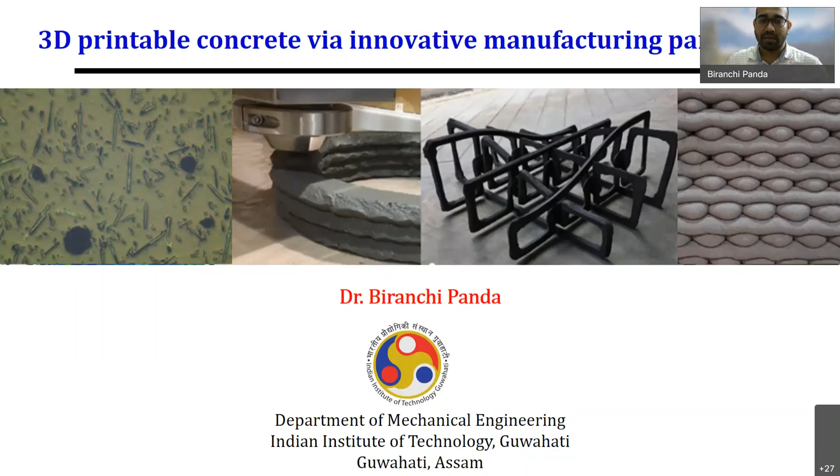Today I'm going to talk about 3D printable concrete. It's a bit of a different, new topic because this technology of concrete printing has evolved very fast in recent years. So I feel very privileged to work on this technology, and today I'm going to talk about the technological advances of this process and where we can adopt this technology for innovative manufacturing, especially related to the building and construction industry. I'm Dr. Biranchi Panda, assistant professor at IIT Guwahati. I'm basically a mechanical engineer, but I have interest in innovating the way we produce buildings through the 3D printing process.

Today the content of my lecture will be the introduction to this digital concrete process, where I'm going to talk more about the concrete printing process. It is purely an extrusion-based manufacturing process where we have to deal with very challenging requirements of rheology, which is the second aspect of my talk. I'll discuss the rheology of the printable material and the materials that we need to fine-tune for the extrusion of this printing process in terms of large-scale printing. Thirdly, we will also discuss the common process parameters and how process and property are related in concrete printing.

Finally, I am going to demonstrate some projects that I have already done and that we're planning to do at IIT Guwahati with the help of the concrete printing process. Without delaying much, I'll go into the digital construction technique.

What is digital construction? Nowadays everywhere we are talking about Industry 4.0, talking about how industry can be more digitalized. In this regard, our construction industry also needs some innovation in terms of automation and digitalization. But if you see the traditional construction process, it is more like a manual process, where laborers and workers are trying to put their hands together to create a structure. If you see this process carefully, you'll find it's a manual process starting from creating the formwork.

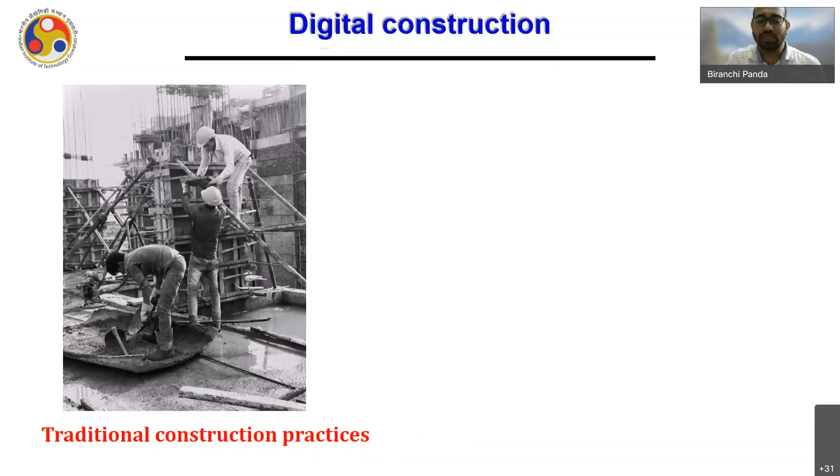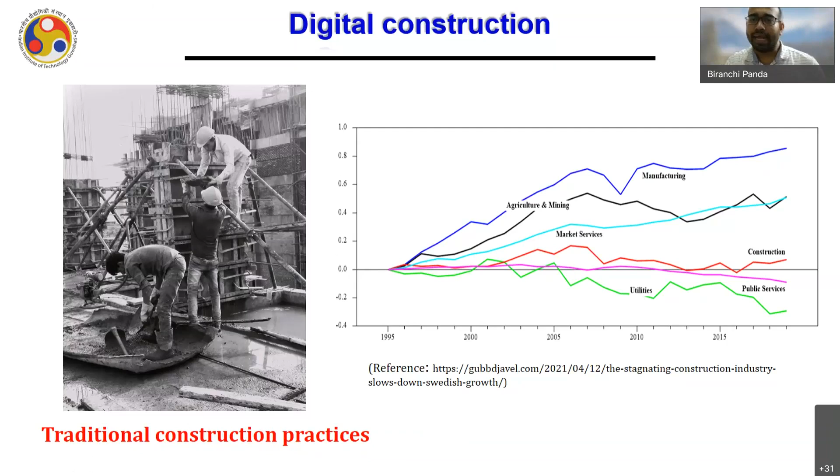So what is the problem with this traditional construction process compared to other manufacturing or other industries? If you see, the productivity is quite stable over the years. So it is very important now that we find some solution to automate the construction process and bring more digital technology into it, which really motivated me to take the help of the 3D printing process to contribute in this domain.

As I mentioned, apart from this labor work, sometimes the people working in construction are putting their lives at risk, where sometimes they have to climb very tall buildings to clean or to do maintenance work.

So these things, we can definitely try to find a technological solution where these problems can be minimized. Of course, the answer is not just 3D printing technology, but rather a group of technologies where we have to perfectly balance the combination to create an automated solution for this industry.

So yes, it's a very good question. Then what is the point of printing concrete? I have two prime reasons for printing concrete. One is design freedom. If you see the structure in my slide, it's a very complex structure. In this printing process, we do not need any mold or the formwork that I showed you previously.

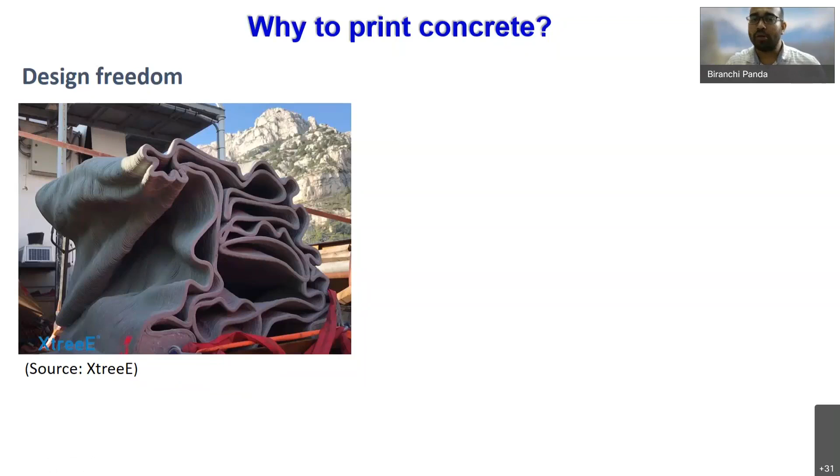So if you want to print a structure, we do not need any mold or formwork. Directly we can print the structure from the 3D model. So the first advantage is that I can print any design, complex structures, without the need of a mold. Ultimately, I'm going to save a lot of cost in terms of creating a mold box.

The second reason, which is very appealing or close to my heart, is all about sustainability. What is sustainability in terms of concrete printing? There is an example of a 3D printed concrete bridge in the Netherlands. What is unique about this bridge? If you see the cross section, it is not entirely solid. Rather, the topology has been optimized to reduce concrete waste.

What does it mean? With the help of this 3D concrete printing technology, now we can optimize the material distribution because we have design freedom. We can create an optimum design where we need less material. In this way, you are also going to save a lot of material wastage that usually happens in traditional construction. So sustainability and design freedom are the most critical points for me.

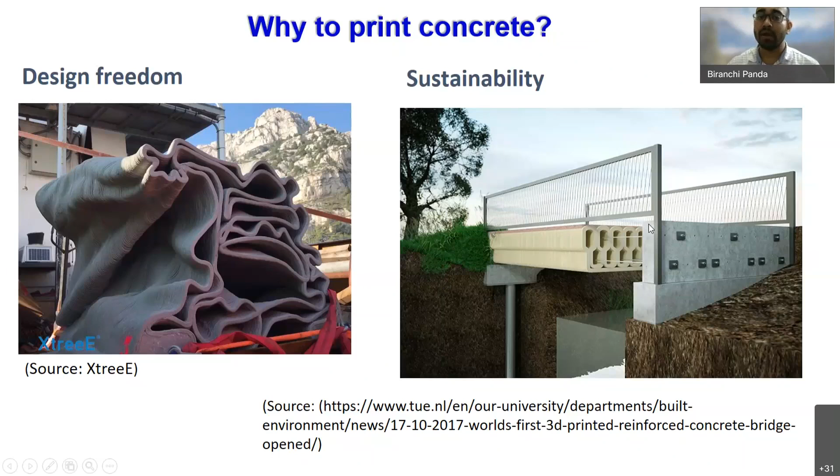But of course, since this is an automated solution, we have more advantages. We can work 24/7, laborers don't have to be there, we have reduced manpower, and the solutions will be more accurate. These are some other advantages of using the concrete printing process, because it's a technology-driven machine which can directly print your structure from a CAD model.

So this is an image of the concrete printing process, where very complex structures can be printed by depositing material layer by layer. As I mentioned earlier, this is almost similar to an extrusion-based 3D printing process. If you're familiar with FDM, where we deposit molten plastic layer by layer, it's almost similar, but the difference is that the layers are not hardened quickly in this process.

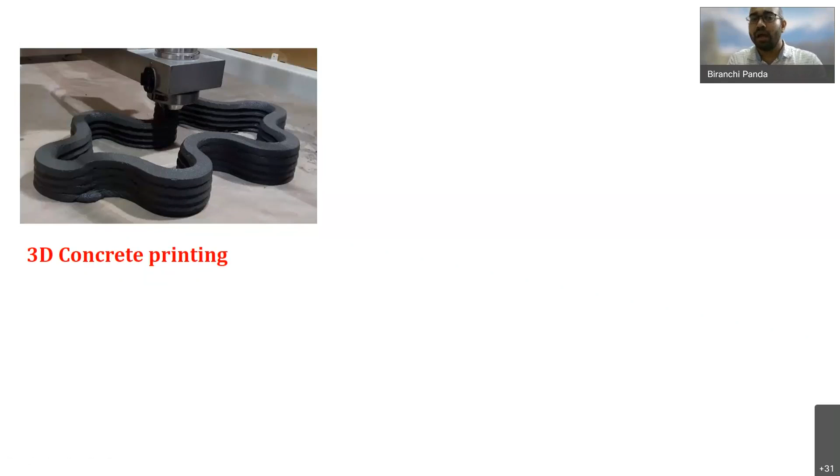You can see that all the layers stacked together are very fresh. It means I can still put my hand in and dig out some material — it's a very fresh material. So we have to deposit very fresh material in the concrete printing process. But in some other solutions, we may have to rapidly harden the material to deposit more layers. Depending upon the requirements, we design the material so the layers will be more stable and won't deform. So this is one automated process that can be applied to the building and construction industry.

There's another process known as D-Shape. It's similar to particle bed fusion. Let's see what happens here in the video. You can see it's a very big machine. What's happening is they're using sand.

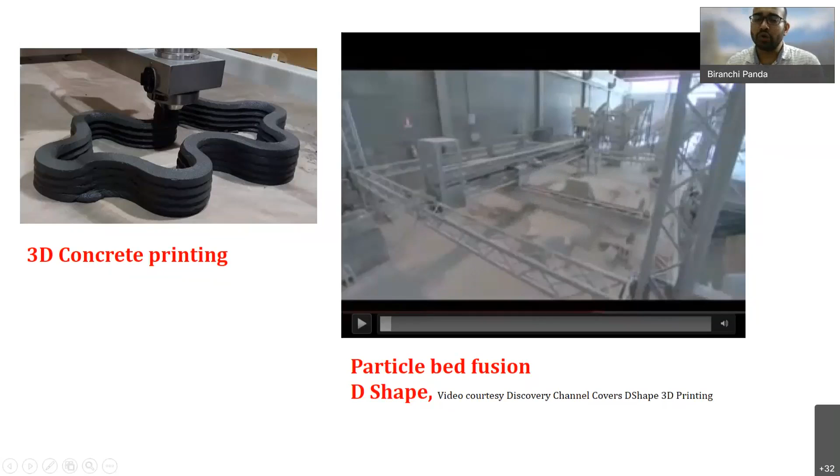They're using sand as powder, and we have a machine where this nozzle is carrying some binders. These binders are being deposited as per your CAD geometry. So ultimately, from a stack of sand, we are selectively depositing this binder, and after printing is completed, you can remove the loosened particles to get the final structure. These two processes are very similar to extrusion-based manufacturing and powder bed fusion. It's a very big machine, but the powder is sand. This is the nozzle, and these are the droplets adding binder over the sand particles to bind them together.

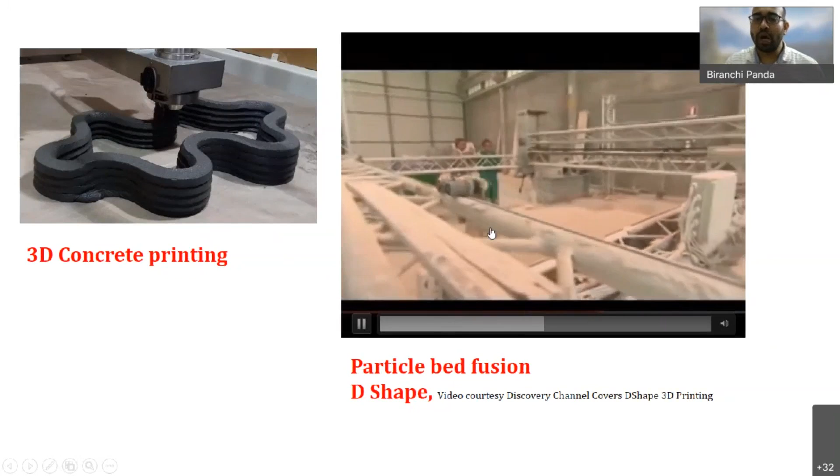Ultimately, you are going to create a very complex geometry — I hope this video will show it. These kinds of very complex lattice structures can be fabricated using this machine. The person you see on my screen is the founder of this technology.

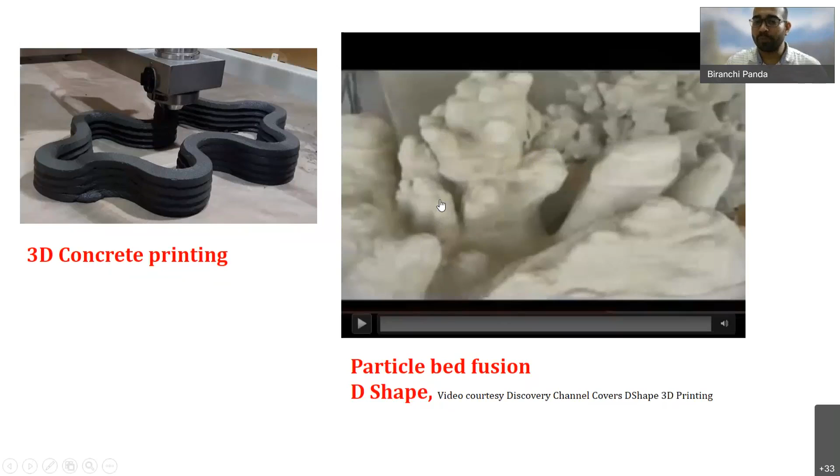So you can see you can create such complex structures using particle bed fusion. The advantage of this technology over extrusion based process is that you can make more overhanging structures because you do not have to put support material. But in extrusion based manufacturing, we have to provide support material or optimize the part geometry if we want to print overhanging structures. In D Shape, as you have seen, the sands act like a support material, so you can print more complex structures in a better way using the D Shape process.

So apart from this, this is all about the 3D printing process. But if I talk in general, what are the automated solutions that are still available in the building and construction industry?

One other process I would like to call smart dynamic casting. What happens here is if you want to create a column which is not cylindrical in nature - regularly, any beam or column has a square or cylindrical shape, but suppose I want an architectural shape, which is very difficult to create using casting. For that reason, this group developed this technology called smart dynamic casting. As you can see, the robot has an adaptable opening, which creates a very complex geometry by twisting this complete nozzle. During this casting process, the concrete is erected and this opening is variable in nature so that you can create very fine architecture over the surface.

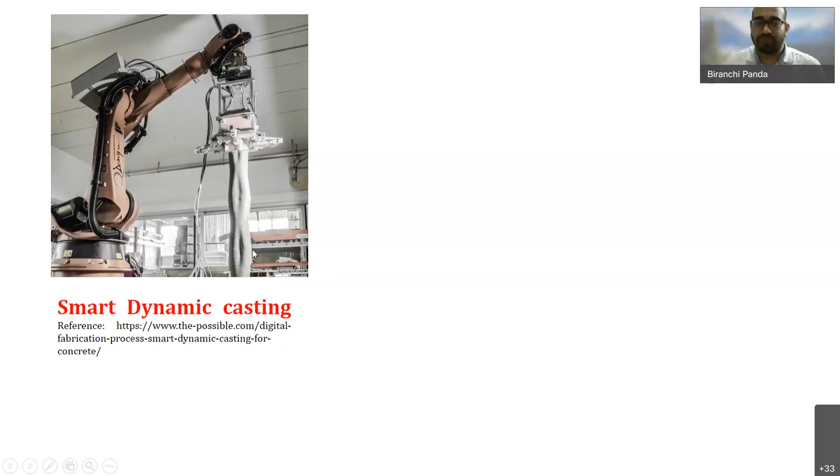Not only this kind of process, we have so many other robotic solutions currently being used in the construction industry, like robot bricklaying machines and robot plastering. So a lot of automated solutions are being implemented in our construction industry.

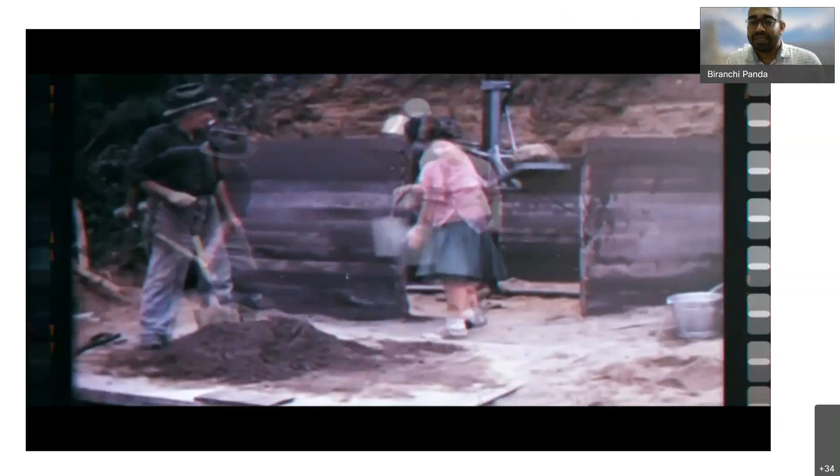But in this talk, I am going to talk more about the 3D printing process, 3D printing of concrete. This is not a new topic - if you see this video, which is almost 80 years back, there was a process where they wanted to print a building by depositing material layer by layer. The material was not exactly cement, and the machine was also not similar to today's machines, but the concept was there 80 years back. You can see in this video they are trying to deposit material layer by layer.

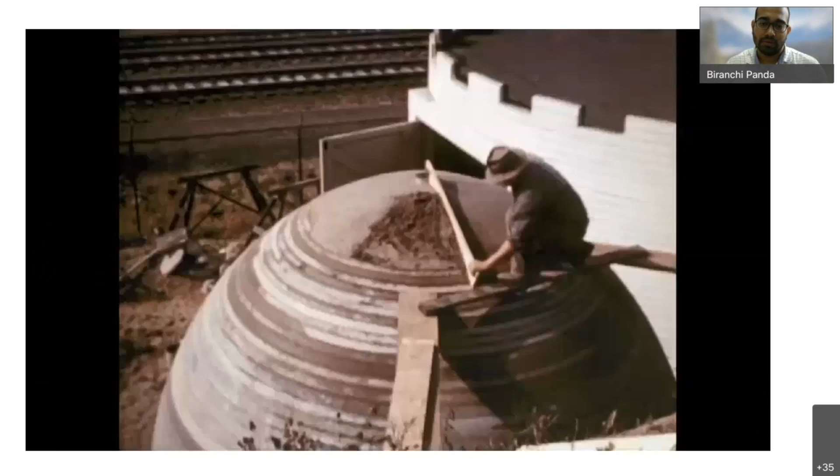This person's time was devoted to the invention of equipment for the food industry. He's the author of the first building 3D printer. He created a prototype, a machine to deposit material layer by layer, and they also called it 3D printing.

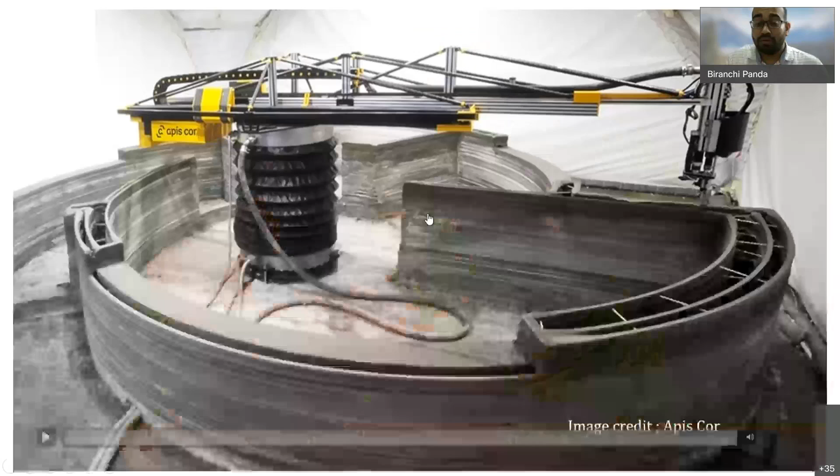After 80 years, news came that this machine could print an entire building in 24 hours. If you compare these two processes, the 80-year-old technology and this one, today we have more advanced machines in terms of robotics, with a higher degree of freedom, so you can create more complex geometries. Even the materials have changed a lot, but the process remains almost the same - we have to deposit the material layer by layer.

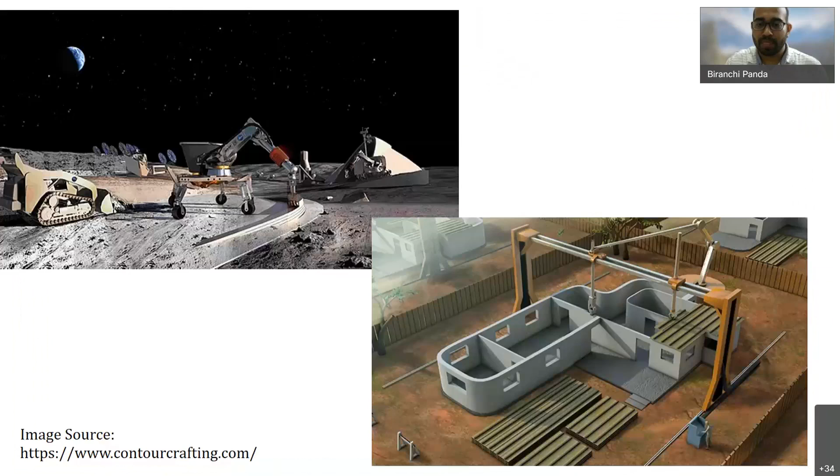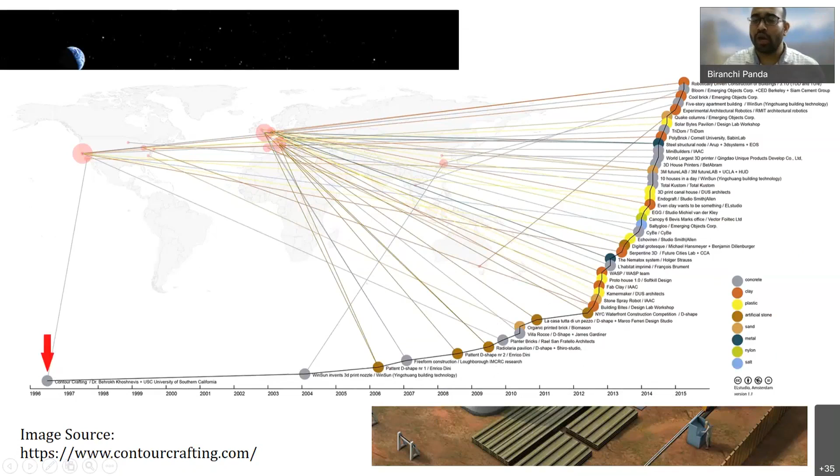After a few years of this technology innovation, it got a lot of attention on Earth, because people wanted to create building structures using similar processes. If you see the complete evolution of this technology, as I mentioned, Professor Khoshnevis put this concept long back, but in recent years, a lot of companies and universities have put a lot of attention into improving this technology, because they feel there is a real need for automated solutions in the construction industry. You can see the graph is increasing exponentially, and today a lot of companies are also doing these projects using this machine.

So how does the process work? As I mentioned, it is similar to the FDM process, where you have to deposit the layers by extruding the fresh concrete.

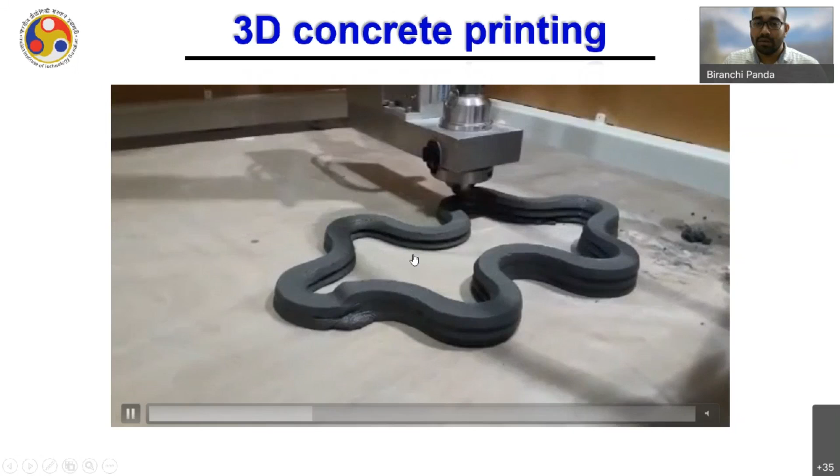This is the nozzle, depositing the fresh concrete. We have a pump bringing all the materials down to the nozzle. This nozzle is a 4-axis system because it rotates during deposition, and we are using a rectangular nozzle to deposit the material. This is a typical process of 3D printing of concrete.

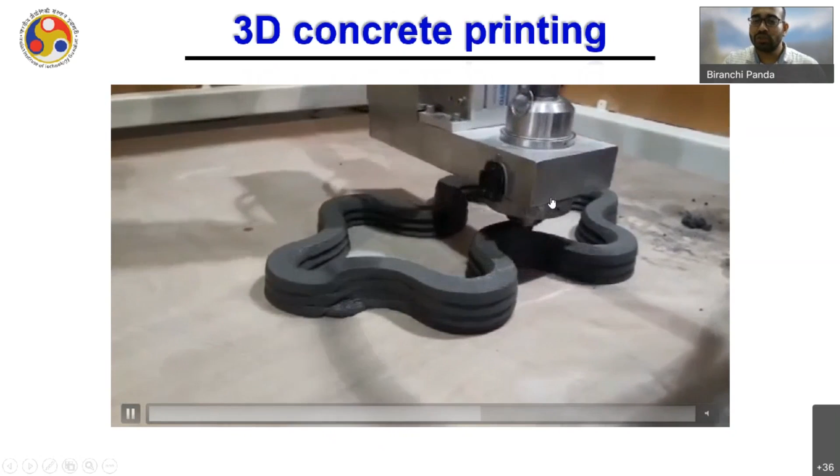You plan the design, and then you have a machine that deposits it layer by layer. We have a control system which provides feedback during deposition, so if any failure happens, the machine automatically recodes the whole system so the deformation or error can be compensated.

This is the machine used to deposit the material layer by layer. As mentioned, it is a 4-axis gantry printer. On the left hand side you can see a controller, and on the right hand side there's a pump. The job of this pump is to bring all the material to the nozzle, and this nozzle listens to the command from the controller and deposits the material over the print bed.

Unlike some FDM plastic printing processes, the bed is not movable here. It is completely stationary, but the nozzle, the 3 axes - X, Y, Z - can move according to the command from the controller. So this is one kind of concrete printing machine. It's not robotic type, but we call it a gantry type printer.

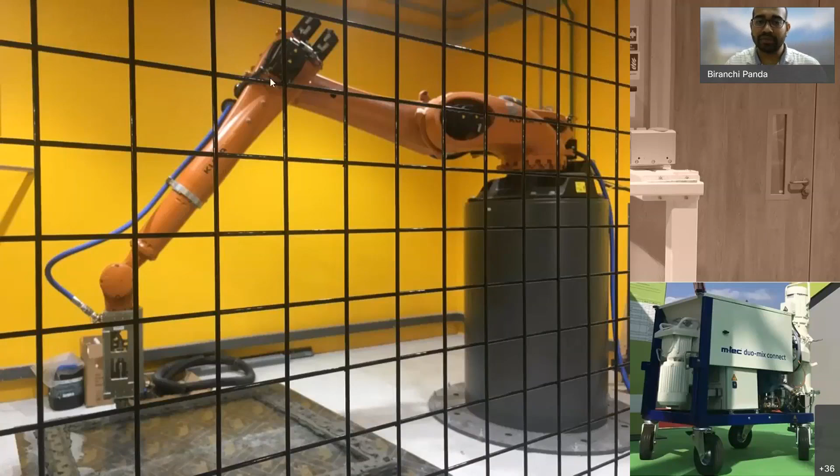But I also used a robotic concrete printer, as you can see, it's a big robotic arm. The nozzle system remains the same, meaning we have a connecting pipe that carries the material from the pump. If you program it, it deposits the material layer by layer to get the complete structure. Now let us discuss the unique material needs for this process.

If you see the concrete, it's a composite material. Those from mechanical engineering can assume this concrete is a composite. It is a mixture of sand, cement, water, and stone. But in concrete printing, we are not currently using stones, rather fine sands. So cement, sand, water, and some admixtures are currently used in the concrete printing process.

If you see the process carefully, it's clear we have to first pump the material to the nozzle. During this pumping process, the material has to be very flowable, otherwise it is very difficult to pump such concrete to the nozzle. So to create a pumpable mix, the viscosity of the material should be as low as possible.

But if you use low viscosity material, once you deposit it, because of low viscosity it is going to spread away easily on the print bed. This is not required in our concrete printing application, because we always want the material to remain in the same shape as the nozzle. Suppose we are using a square or cylindrical nozzle, the filament we deposit on the print bed should retain its shape as it is. If it flows or spreads away, it means the material is very poorly designed, or it's a very bad material for concrete printing.

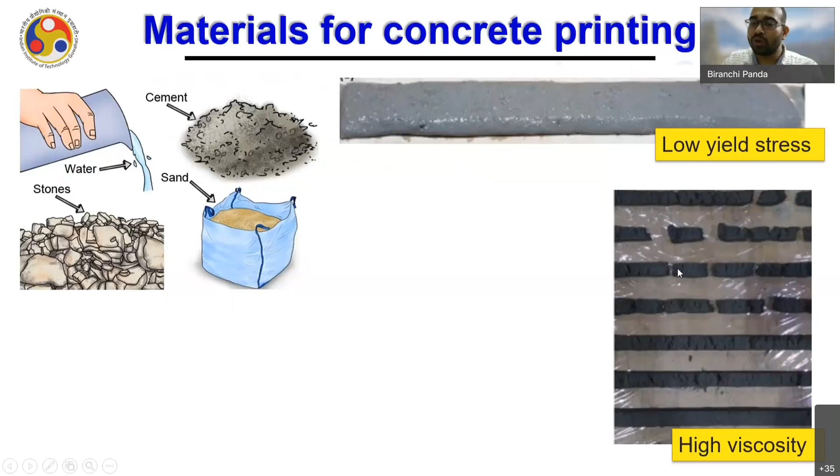But for my pumping process, I have to create a very flowable mix. Yet if I simply deposit this flowable mix, it will flow away on the print bed. So neither do I need this kind of material, nor a very stiff material. Because if I have a stiff material, I have to apply very high pressure for pumping, and once deposited, the layers will be discontinuous in nature. So this is the problem with high viscosity material.

So now let us talk about how we can improve this process. To improve it, we need to maintain a minimum yield stress so that the material should not flow away, nor should it be discontinuous during printing. So we need a minimum yield stress for pumping, and the same yield stress is responsible for holding the shape as per the nozzle.

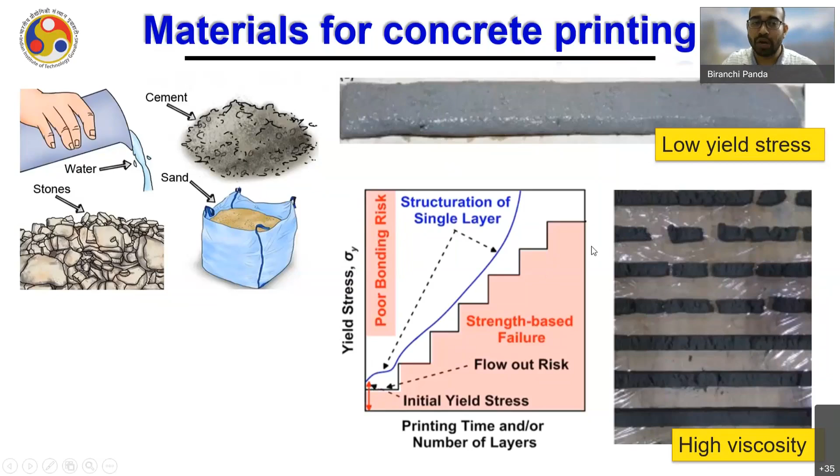But if the yield stress is very high, we are going to have an issue of poor bonding. And if the yield stress is very low, after printing 2 or 3 layers, it is going to collapse, as shown in this picture. So we need a minimum yield stress; if it's too low, after printing a few layers, it will collapse.

If the yield stress is too high, we are going to have a very poor interlayer bond strength. So what happens if you do the bond test? You will get a very poor interface bond strength.

This means we need a minimum yield stress for printing, and with time the yield stress has to be increased, otherwise you cannot deposit more layers. So again we come back to the same concept like FDM, where the material has to be hardened with time, because I want to deposit more layers. More layers means I want a structure beyond 2 or 3 meters in height, so the material yield stress has to increase with time so that it won't collapse during printing.

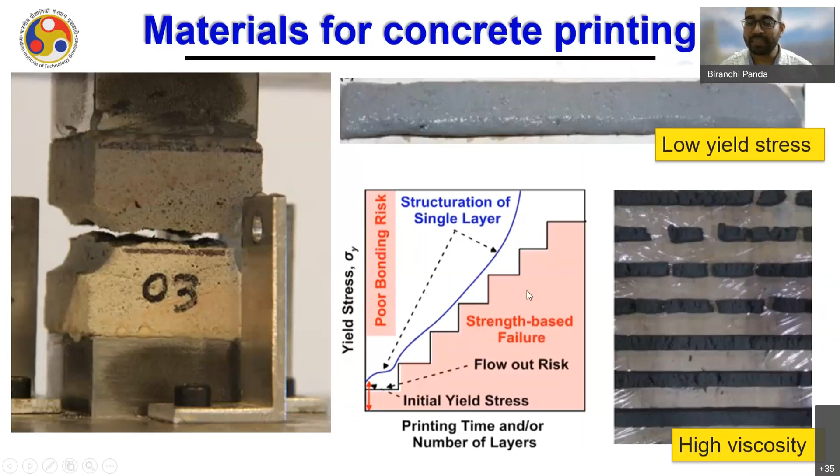So this is the key mechanism of designing material for concrete printing application. We also use the concept of thixotropy. What is thixotropy? It is a scientific phenomena of fluid flow.

For example, early morning when you press a tube, the paste comes out very easily. You don't have to press very hard to get it out. So we need very little pressure, but once you deposit the material, it remains in its own position. It neither spreads away nor is it difficult to squeeze out. This means the material has thixotropic property. Thixotropy means once you apply a high shear rate, the material should easily come out of the nozzle, but as soon as you remove the force, or stop pressing the tube, it should remain in its original position. That is the unique feature of thixotropy, and we need similar material property in the concrete printing process.

As I mentioned, the minimum yield stress is something around 1000 Pascal. If you maintain this kind of yield stress, we can deposit the layer smoothly without any deformation.

Can we get this yield stress if we use cement, which is very commonly used in the construction process? Yes, it is possible, because if you look at the mechanism of cement grains, this is explained with respect to time. Once you add water to cement particles, they try to flocculate, coming together because they have a van der Waals force of attraction. Also, with time, CSH particles get formed, and they try to bind the two cement particles.

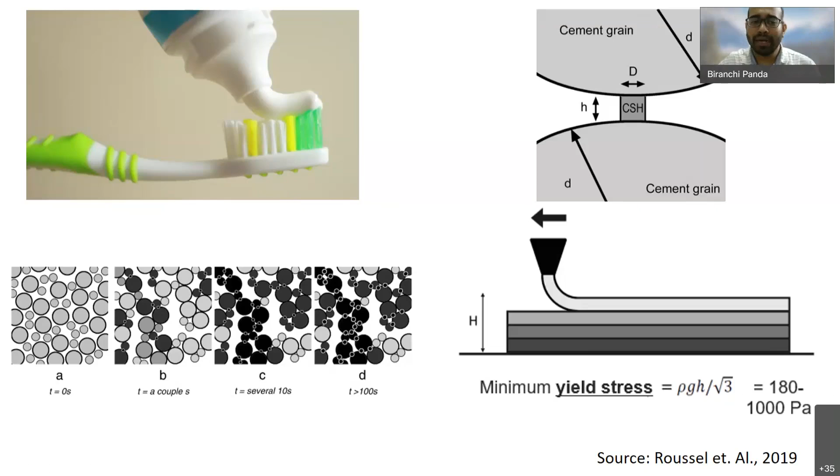For this reason, to maintain environment friendly material, we collected some industry waste and tried to replace it with cement. This industry waste is spherical in nature, a waste product of a power plant industry, and we wanted to replace cement with this industrial waste, thinking we could create a more sustainable mix design for this application.

When we replace cement with such spherical particles, they can easily flow away, so ultimately the yield stress becomes very low. If I deposit more layers, it is going to collapse after printing just a few layers. If you see the structure, it is completely collapsed after printing a few layers.

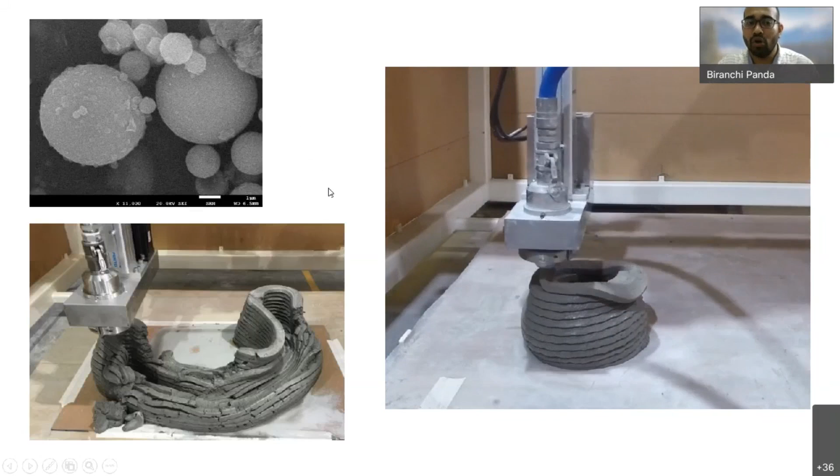We still wanted to use this industry waste in our mix design, because our goal was to create a sustainable mix. For that reason, we tried to investigate what else we could do to improve the buildability.

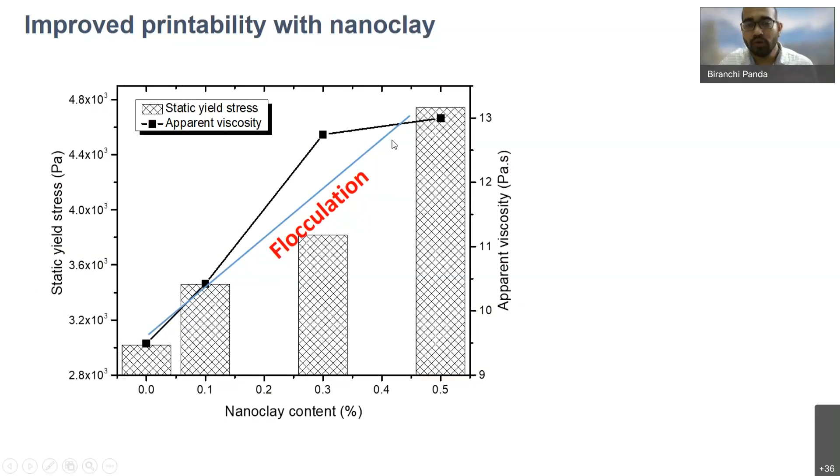If you look into the mechanism of how the clay is affecting the process, we found flocculation in the process, which is improving the yield stress of this waste-replaced material.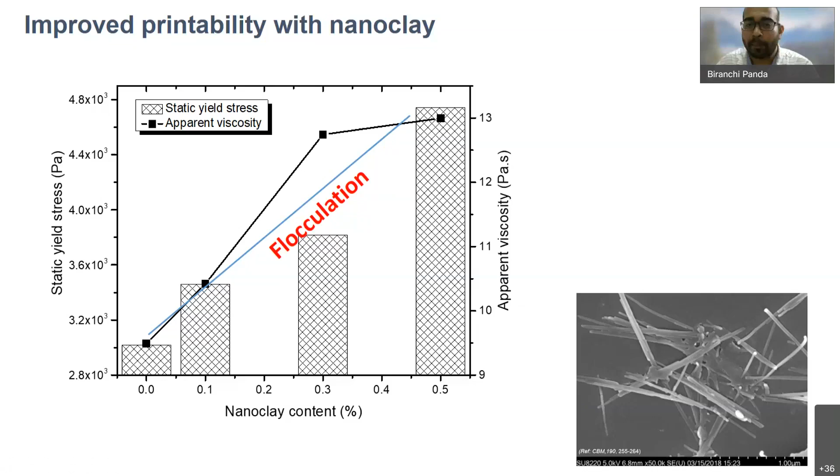So how does clay affect the rheology? There are several concepts demonstrated in the literature, but especially in the case we are printing concrete, we found the flocculation of the clay is very important, which improves the yield stress to a significant value, so that I can put more layers without any deformation.

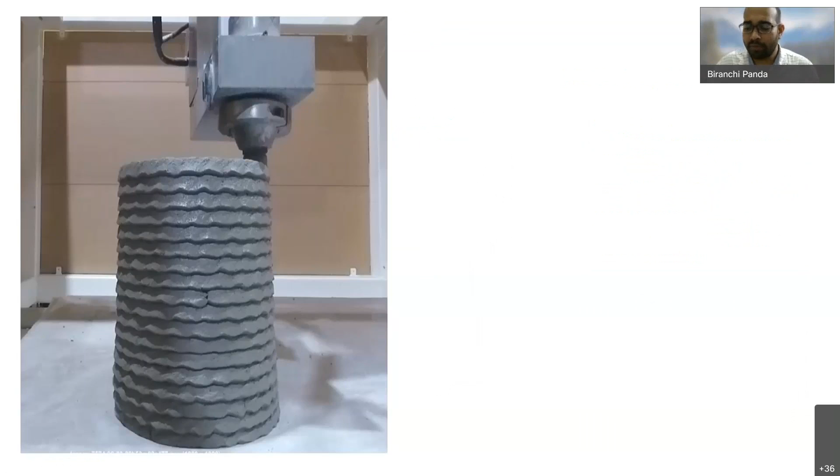As you can see, more layers have been added now without any deformation. So it is the clay that increases the flocculation, and as a result we can deposit more layers without structural collapse. Sometimes what happens is, since these materials are very fresh, deformation occurs.

So to avoid the deformation, we added a distance sensor which continuously monitors the distance from the top. If there is any deformation during the process, we get feedback, and accordingly the process parameters are adjusted so that the deformation can be minimized. This is how we improved the process to minimize deformation.

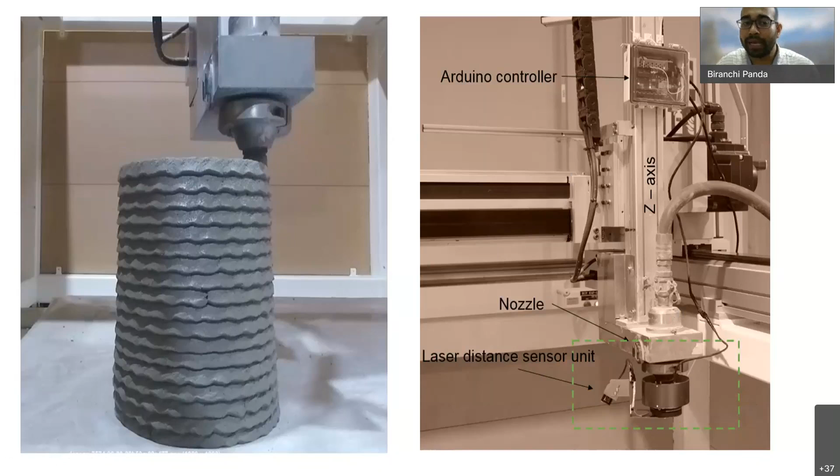Now, when you have thixotropy behavior in the material, it's very important to characterize the thixotropy, otherwise we cannot create a new mix design. To characterize the thixotropy, we use a rheometer available in our lab. We did two tests: one is shear thinning testing, and one is viscosity recovery, to measure the thixotropy of our material.

What happens in the shear thinning process? We take a bulk of material and apply a high shear rate to see what happens to the shear stress. With the material we printed, we can see that once you apply a high shear rate, the shear stress comes down to a very low value. This gives a factor of lambda around 0.41.

This says the material is very good for concrete printing application, because as soon as you apply a high shear rate, the viscosity or shear stress goes down to a very low value. If this equilibrium value is not low, it means that even after applying high shear rate, the material is not completely breaking down, and the shear thinning behavior is not good for your material.

This is how we characterize the shear thinning behavior, which tells us the effect of pressure on the material during pumping. If this breakdown is more, it means we can easily pump the material without any problem. So it's all about characterizing the pumping process through the shear thinning protocol.

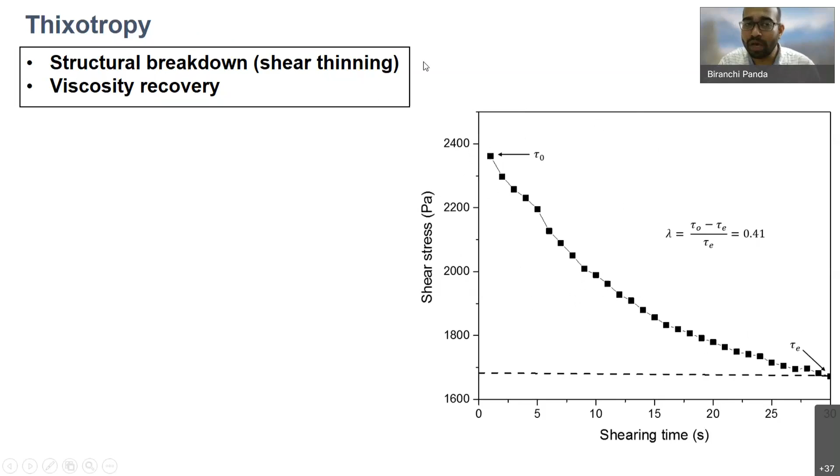Now once you deposit the material, it's very important to measure viscosity recovery. It's very clear that during pumping we need a low yield stress or low viscosity material. But the same viscosity cannot remain once you deposit the material on the print bed, because with low viscosity the material will simply flow away. So we want the material to recover its original viscosity - meaning, before you pump the material, what was its viscosity at rest.

So you mix the material, put it in a chamber, and measure the viscosity. During pumping, because of the high shear rate, the viscosity goes down to a very low value. But after you deposit this material on the print bed, it should have the capability to recover its original viscosity, or else it will simply spread away after deposition.

The material we printed has the ability to recover almost 80 to 90% of its original viscosity, which is really good, because this higher viscosity on the print bed helps maintain the shape of the filament according to the nozzle shape. This is how we always characterize new materials to fine-tune the mix for concrete printing application.

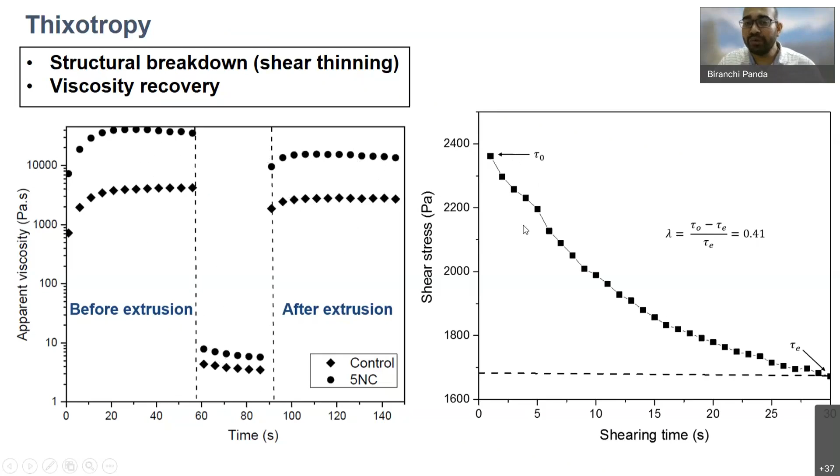So the material will get stronger with time, so that once you deposit the top layers, the bottom layers will also harden, and as a result, the structure is not going to collapse at all. So this was the initial development of using a waste material for concrete printing application.

Then we also worked for a competition organized by NASA. As I previously told you, the key concept was to create habitat for astronauts. They put an advertisement that we are going to have a competition where you have to print concrete structures, but the challenge was you don't have to use water. As you know, in concrete we always add water to mix the material, but for this competition we developed a new material which required very little water, as the competition targets using the minimum amount of water. So we developed another polymer known as geopolymer for this application.

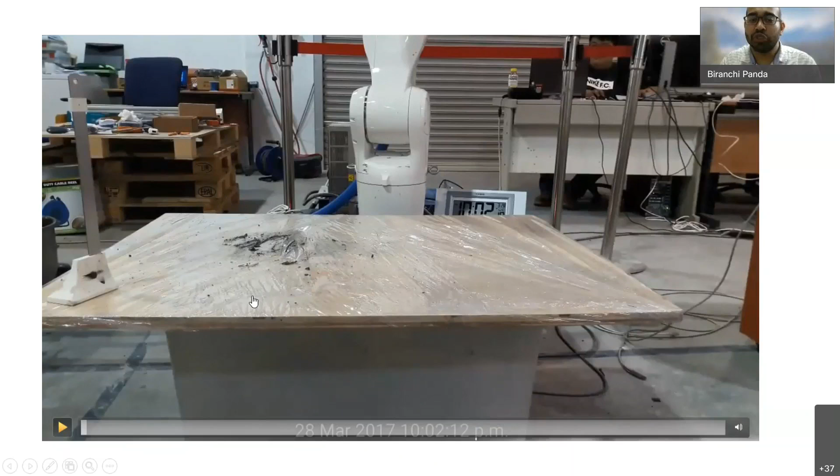As they mentioned in the competition, we have to use an automated system. So we had a small robot in the laboratory. We just converted it into a printing process, and you can see that with our newly developed geopolymer material, we were able to print some structures for them. It's a very simple machine. The robot is connected with a pump, and this pump is depositing the material directly to the extruder, and as per the CAD model, these materials are being deposited layer by layer.

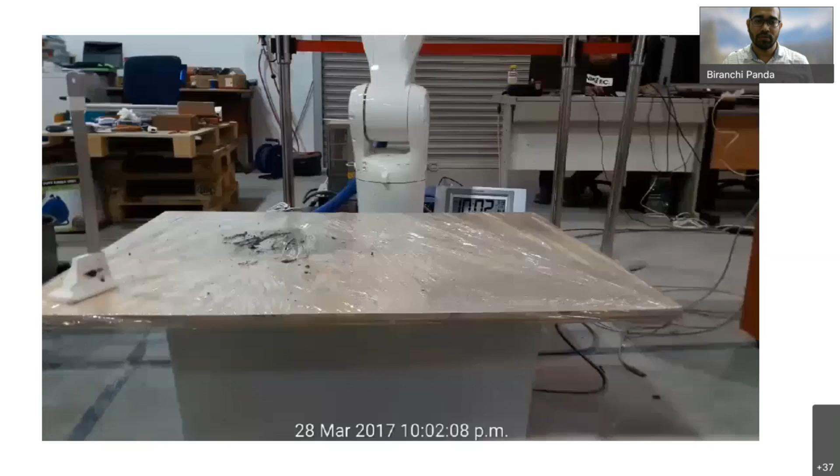If you investigate the material mix design, it contains the same waste materials like fly ash and slag, and instead of water we use an activator which is potassium silicate solution. This solution has higher viscosity than water, and it depends on the concentration of the activator. If we use a 1.8 molar ratio activator concentration, its viscosity is slightly higher than water, and if you go for a 2 molar ratio activator, its viscosity is again higher. So ultimately, according to the viscosity of this activator, we end up with a material of higher or lower viscosity.

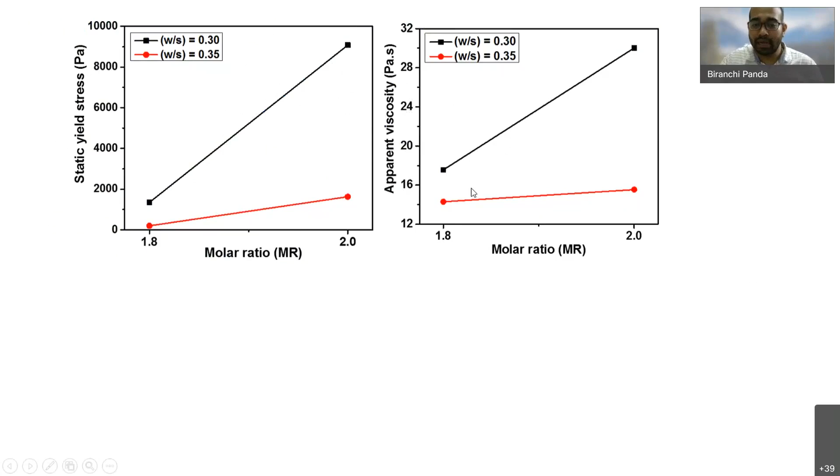In concrete printing, we have to carefully control the viscosity of the mix, so it's important to find the suitable activator for your application. Different activators and different molar ratios create mixes with different yield stress and viscosity, because the activator plays a critical role in controlling the viscosity of the final mix. When you have a concentration of 2.0, which creates higher viscosity, you'll expect a material with more shape retention compared to the 1.8 activator concentration material. So if you're trying to develop a new mix design, it's important to know the critical components affecting your viscosity, and if you know the viscosity needed for your application, you can control the mix design to have a controlled filament as shown in this picture.

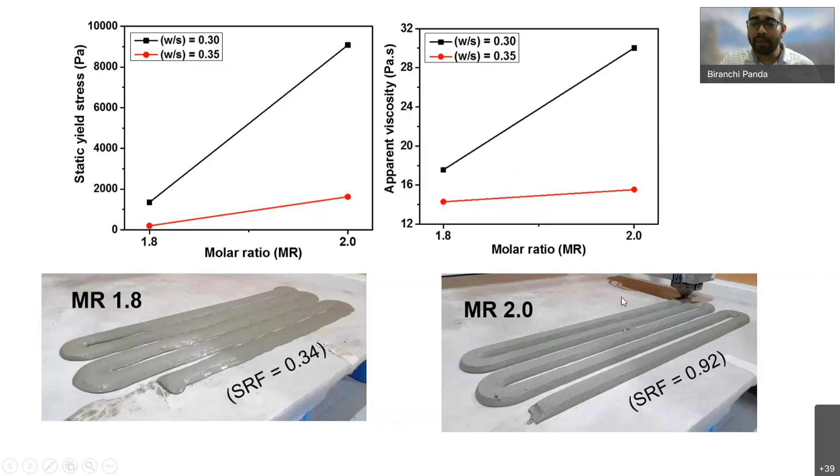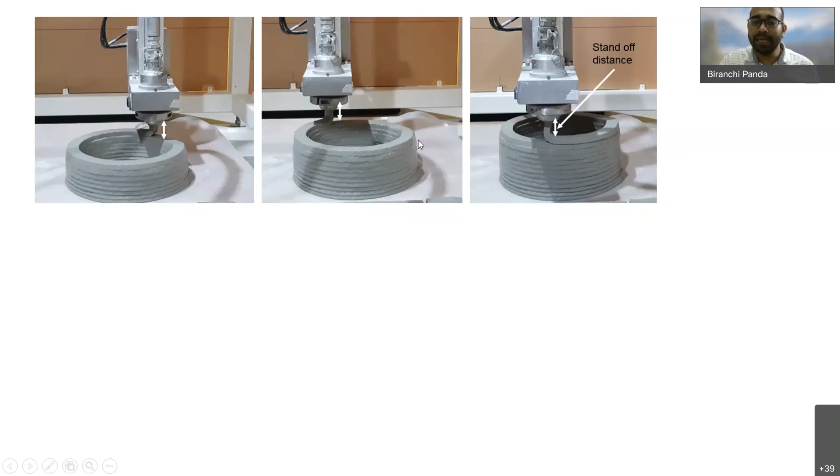Of course, if you add more layers, depending on the material's yield stress, the deformation will grow. What we've seen is that when you print a very poor material, after printing a few layers, this deformation height starts to increase. We call this the stand-off distance. With more layers added, this distance keeps increasing. But if the material is not deforming at all, it means all the layers are stable, and you won't find any deformation height between the tip of the nozzle and the top layer. This is how materials are always characterized for a final print.

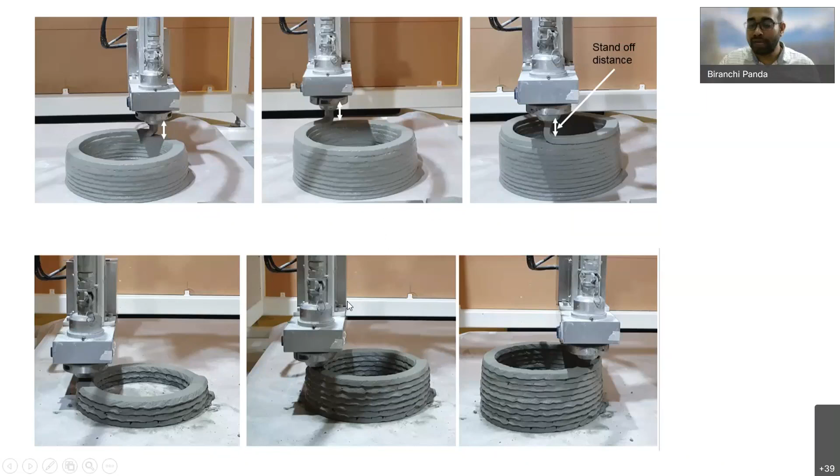So you may go either for a rheological test, or sometimes students try to do a test to find whether the material is slumping — in civil science we call this slumping behavior. If the material is slumping during printing, you'll get this stand-off distance increasing. But if there's no slumping, the material is very stiff and accurately deposited, you won't find any significant difference. This is how two materials behave completely differently from a concrete printing point of view. With this printing process, we're able to print 60 or more than 80 layers without any deformation.

We also try to print some overhanging structures to explore the possibility of printing complex geometries, because in 3D printing it is better to explore more complex shapes which cannot be cast. Ultimately we are able to print this new material without any issue of collapsing.

But the point is, if you want to do the same thing for the previous mix design, we have to do some modification at the nozzle, because to control the material buildability, we have to find some solution so that once you deposit the material, it quickly gets hardened.

There are different solutions you can adopt at the nozzle so that the material can be hardened. Some solutions use microwave at the nozzle to immediately cure the concrete so you can deposit more layers. Other solutions try to add some chemical so that the material quickly gets hardened after being deposited.

So there are many solutions to increase the hardening rate of the concrete being deposited, so that you can put more layers. If you go with the chemical approach, you add chemicals which decrease the setting time of concrete - setting time being the time needed to get hardened.

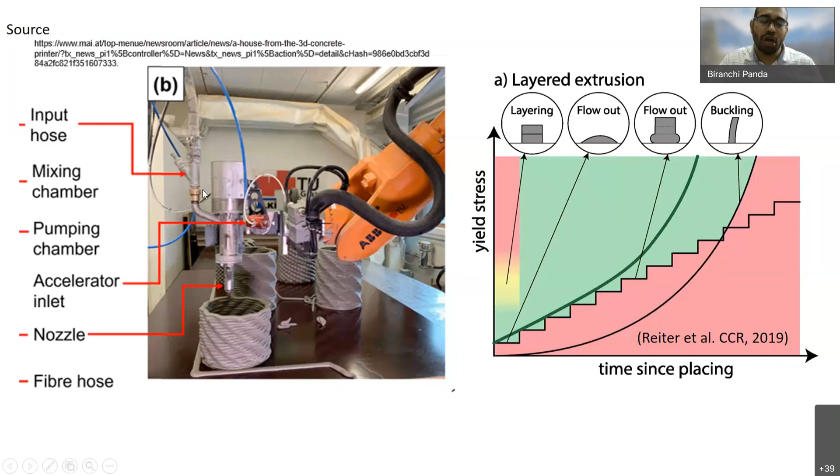This has been depicted in the picture - with time, if you want to print a taller structure, the yield stress has to go exponentially high. This is possible, as I mentioned, by adding chemicals or by adding microwave heating, which can cure the concrete at a much faster rate.

Apart from this test, we also developed some new tests to see the green strength, because you are loading the fresh material layer by layer, so it is very important to know how many layers you can deposit. The material being deposited experiences a compressive force from the top layers, so we conducted the green strength test to measure the load bearing capacity of this material.

We conducted the test at different time intervals. This is most important in concrete printing, because since you are printing a large structure, the first layer may be deposited at 5 minutes but the last layer at 150 minutes. The material behavior will change because concrete hardens with time, so it is very important to know how your material behaves at different time intervals.

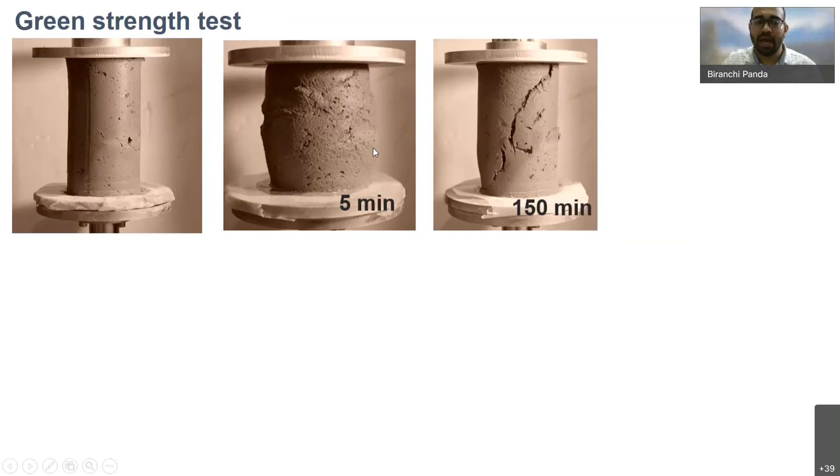To get more knowledge about the green strength, we conducted this test where we compress the material at different time intervals to know the load bearing capacity. We got this load versus deformation graph, and using this graph along with another test known as the shear test, which is used to find the shear property of the material.

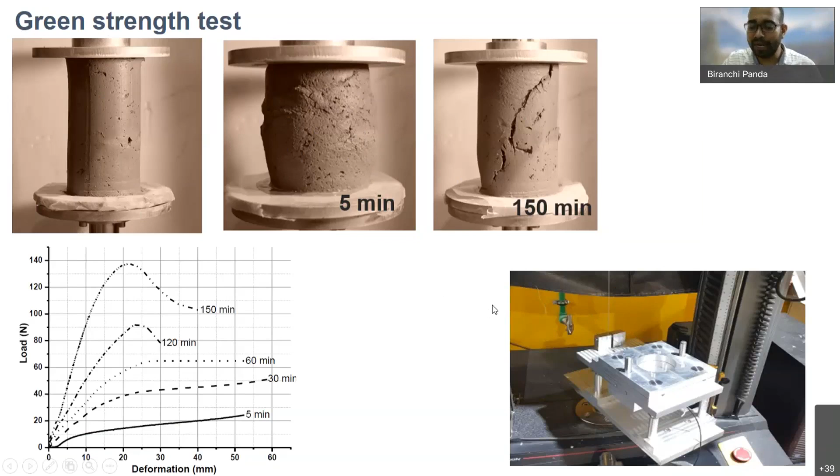Compressive property and shear property are combined together to do a modeling, so that we can at least predict how many layers we can deposit before the complete structure collapses.

This model incorporates the time dependent property of the material, so that if the material is hardening at a very fast rate, you won't see much stress on the bottom layer. Depending on the height of the structure being printed, this stress has been simulated in the model so we can predict the number of layers we can print.

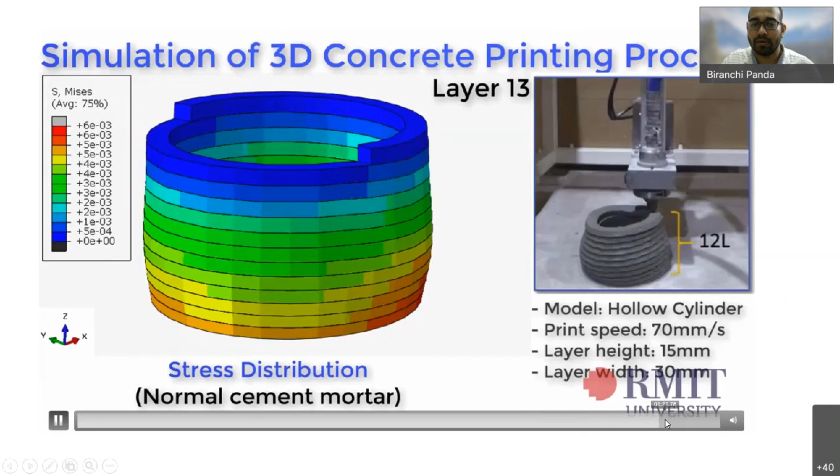So bulging effect you can see. So why is it important?

Sometimes we want to print a very tall structure, so we can't directly go on a trial and error basis because it's a very large structure. If it fails in between, it's a very difficult task to clean all the materials and reprint. So it is always better, with our experience and material data, to build a buildability model so that you can predict at which layer it is going to collapse. So we stop the machine and take a break before printing more layers, because by that time the material yield stress will improve, so that addition of more layers is not going to disturb the structure. So this is all about how you deal with material.

But in other 3D printing, we also deal with process parameter design. Similarly, in concrete printing, process parameter design is important. For example, if you want to print material at different speeds, without changing the flow rate, if you increase the print speed, the filament width is going to get smaller. And if you go very slowly, more material will be deposited, so the filament width is going to be more. So we always have to deal with this kind of problem.

So before we do printing, we have to optimize the relationship between flow rate and printing speed. These have to be combined together, otherwise the filaments will look very ugly — either over deposition of material, or sometimes the filament will be too small. So this is how we deal with printing speed and flow rate.

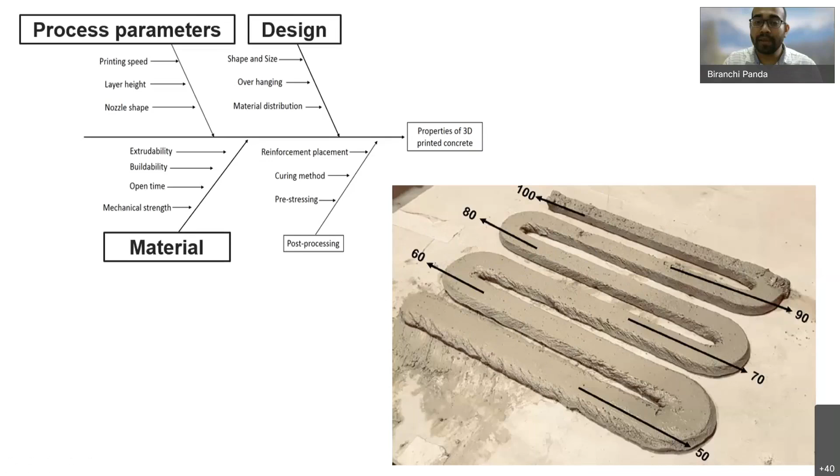Sometimes, depending upon the nozzle shape, we also get different properties. For example, if you use a cylindrical, circular nozzle, you end up with this kind of porosity. But if I have a square nozzle, I can get more compact structures. So one more point I'd like to highlight is that in concrete printing, only the nozzle shape is not important, the material is also important. Whatever picture you're seeing here, this material is very stiff, so you can see that even after printing, it remains its shape exactly the same as the nozzle diameter.

But now imagine the material you're printing is slightly slumpy. What's going to happen? This cylinder is going to turn into an ellipse, and as a result, you're going to get less pore space in the structure. So the key point here is that in concrete printing, it's not only about the material, but the process parameters are also going to affect the final print quality of the structure. So if I use a very stiff material with a circular nozzle, the layers will be exactly the shape of my nozzle, and we're going to get more porosity.

But the same nozzle can be used with a very slumpy material which is going to deform after printing, so ultimately it minimizes the pore. And instead, if I'm simply printing the whole structure with a square or rectangular nozzle with higher overlapping, this porosity can be further minimized.

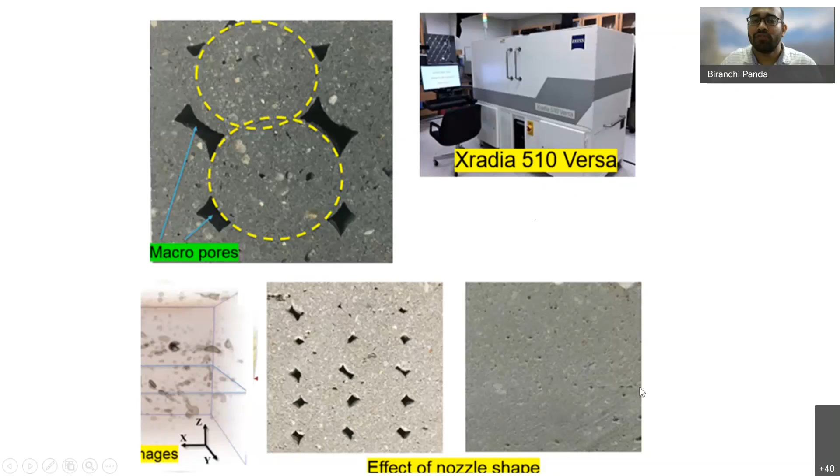So now let us talk about design. Why is design important? To do some design experiments, we printed a toilet unit — a 1.8 meter tall unit that we designed. During printing, we observed sometimes a cornering issue, which we call that because here we have a sharp radius of curvature. We found that during printing of this radius of curvature, we get some layer tearing on the outer periphery of these layers.

So you can see these tearings happen, and we investigated that it happens for many reasons. Suppose you're printing with a very stiff material, you can always expect this kind of tearing of the surface. But even if you don't want to change the material and still want to avoid this tearing, the only solution is to improve the radius of curvature. But from a design perspective, if you don't want to do that, what's the other solution? You have to make the material slightly more slumpy, so that even this sudden change in the radius of curvature or sharp turn doesn't affect it, because your material is now a bit slumpy, not stiff. Stiff material turning very fast with less radius of curvature, you're going to end up with such a scenario.

But if you keep increasing it, you're going to minimize this defect. At the same time, there are other solutions — as I mentioned, your material can be slightly softer, and you can also go slowly during this turning. So there are many aspects that finally control the quality of your printed object.

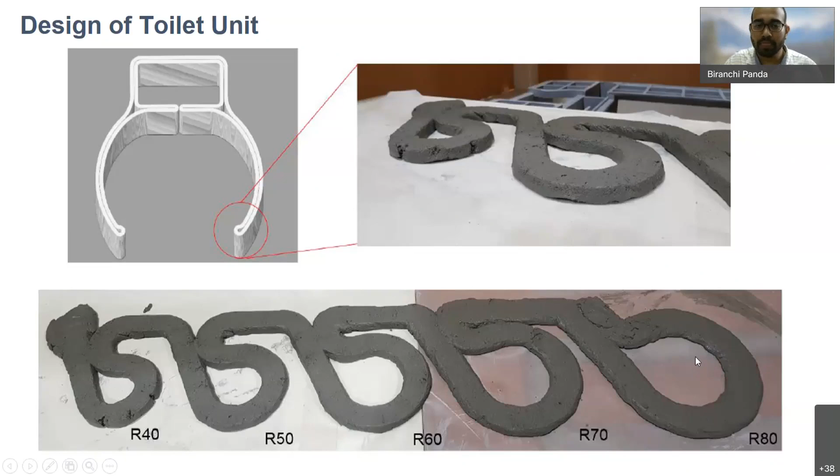Now let us discuss about the strength. Normally in casting, we have one strength, but in concrete printing or other 3D printing processes, we have anisotropic property. This means that in different directions, we get different strength. The same happens for concrete printing.

To prove that, we printed a block and then extracted smaller blocks out of this big cube. Then we applied force in different directions, F1, F2, F3. You can see these layers are oriented in different directions. We applied force in different directions and wanted to see whether this concrete has the same property in all directions or a different property.

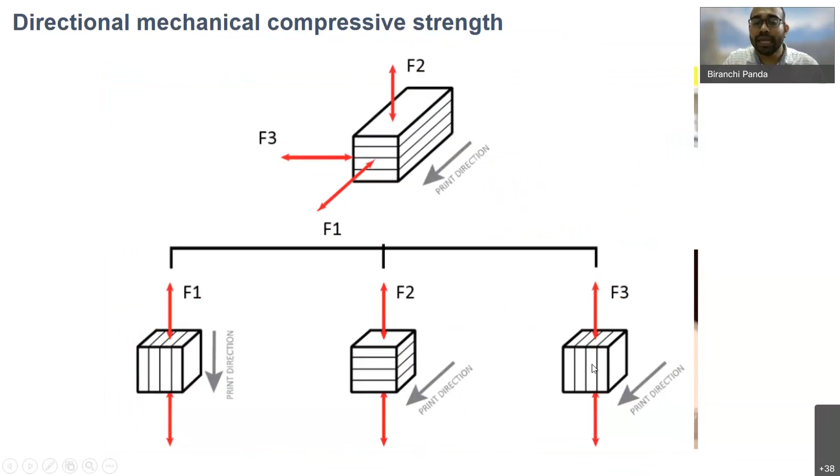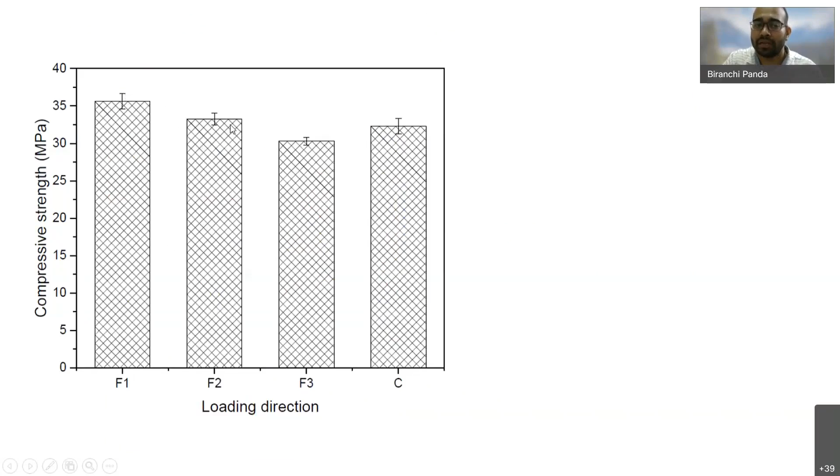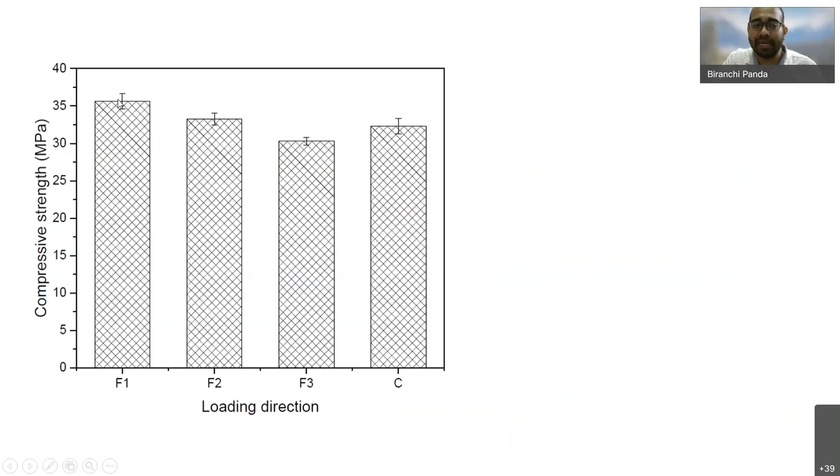We found that for compression loading, F1, F2, F3, though F1 has higher strength, the difference between F1, F2 and F3 is still acceptable in the building and construction industry, but it is slightly higher than the casted one. Why does this happen? Because if you're printing in the F1 direction, the material is more compacted in that direction, so of course you get more strength.

What is most interesting is when you conduct a 3-point bending test, because here two directions are very critical. In the F1 direction, if you apply force, the strength is going to be very low because in this sample the bond strength between layers was very poor. So doing the 3-point bending test in F1 direction, we ended up with very low bending strength, but in F2 we got the highest strength.

When we discussed the poor bending performance in the F1 direction, we found an interesting phenomenon, which is related to bond strength. If the bond strength can be improved, the strength in the F1 direction can also be improved.

So we started investigating the bond strength. For that, we printed two layers of concrete with different time intervals, because as we know the concrete hardens with time. With different time intervals we printed these two layers and did the bond test, and we found that this bond strength is a function of material, time gap, and process parameters. Let me explain this to you.

Suppose the material is hardening very fast; in that case, even a gap of 5 minutes between these two layers will create a very poor bond strength. But if the material is a 'sleepy' material that doesn't harden immediately, even if you delay 5 to 10 minutes, you will still get acceptable bond strength. So how fast your material hardens and what the time gap is are highly dependent on each other and affect your bond strength.

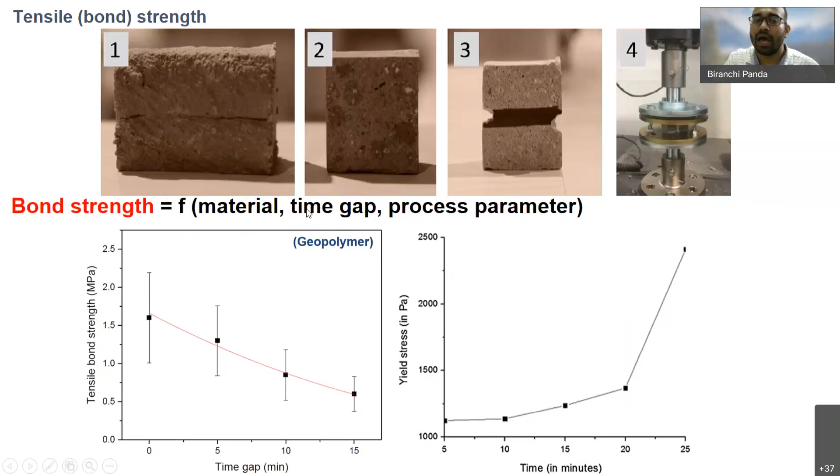What about process parameters? We found that during printing, if you print with a very slumpy material and squeeze it—meaning you press the layer—in technical language, pressing a layer means decreasing the layer height. When we decrease the layer height, and if the material is very fresh and slumpy, meaning it has fluidic nature, the porosity between the layers can be minimized.

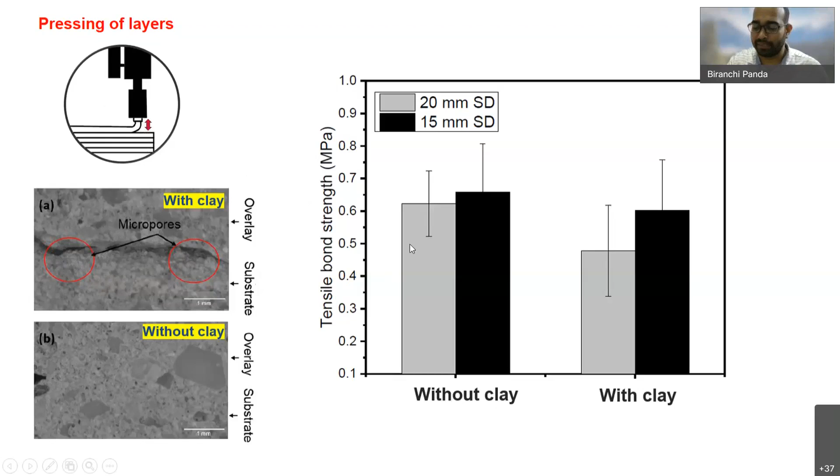The same thing does not happen if you have a stiff material, because even if you press during printing, there will be some voids which cannot be avoided. But if the material is fresh, this void can be avoided. As you can see, even by lowering this layer height during printing, porosity can be minimized, and reducing porosity improves the bond strength.

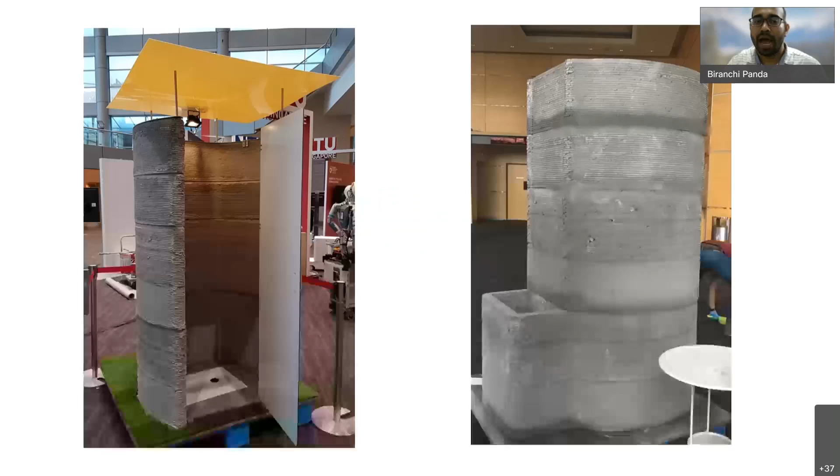With this knowledge of material design, process parameters, and structural design, we conducted a few projects. As I mentioned, our first project was a demonstration of toilet printing—almost a 2-meter tall toilet unit. We printed this, and at that time our Prime Minister visited our university. We demonstrated the technology, and he appreciated that within a very short span of time, the whole structure could be printed.

Of course, there are some problems which can definitely be solved in future printing. But he really appreciated that this is how we should print structures, even more complex ones, which do not require any mold. Without the need of a mold, you simply design the structure, press the button, and it prints the entire structure for you.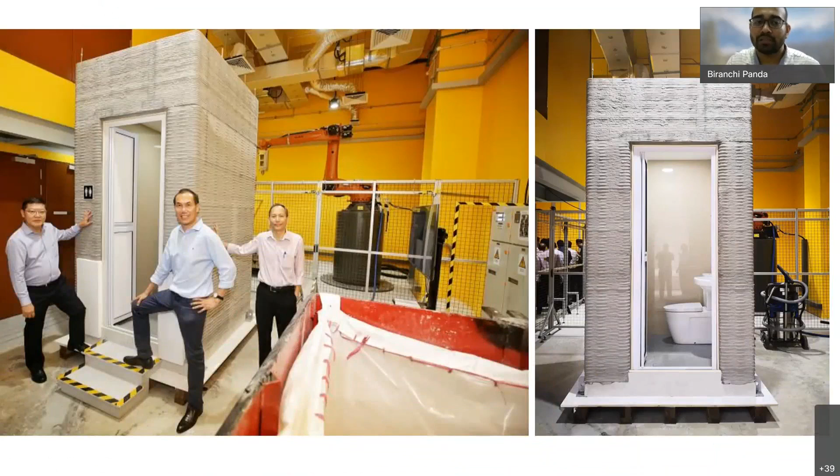The next project was about printing a complete bathroom unit, almost 3.2 meters tall. Since the gantry printer was not sufficient, we used a robotic printing system to print the entire bathroom unit. The bottom part was cast, while the walls were printed with lattice structures. We preferred lattice structures because they make the wall more lightweight.

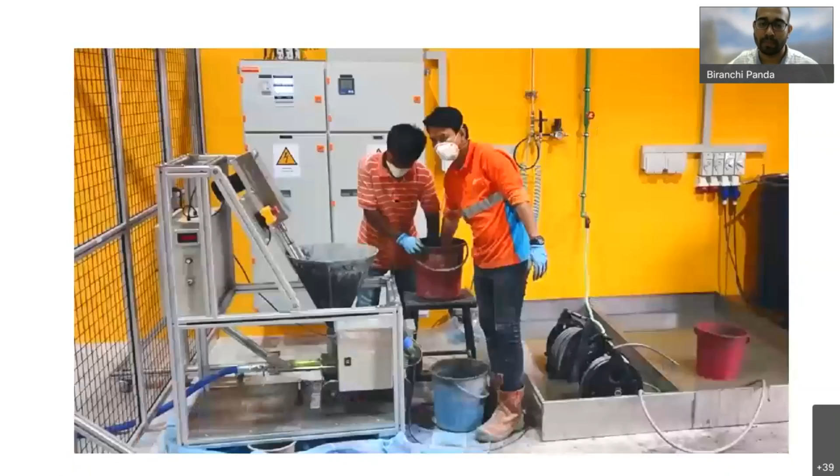I hope there's a video so you can see the complete printing process. See the pump—it is going to push all the materials.

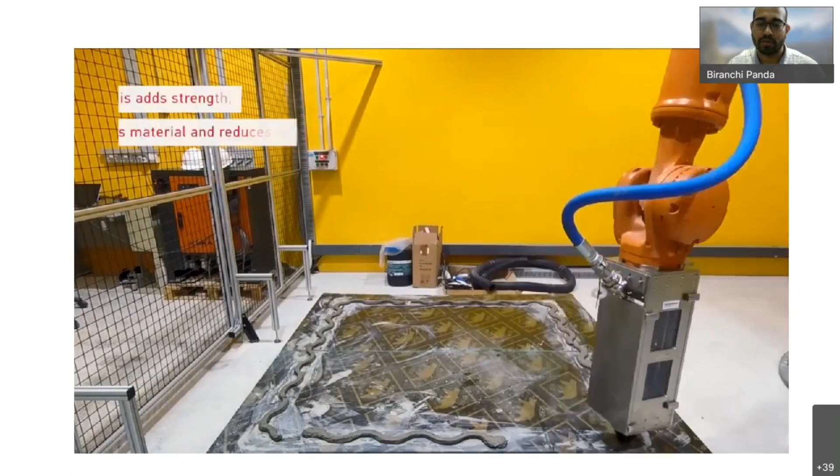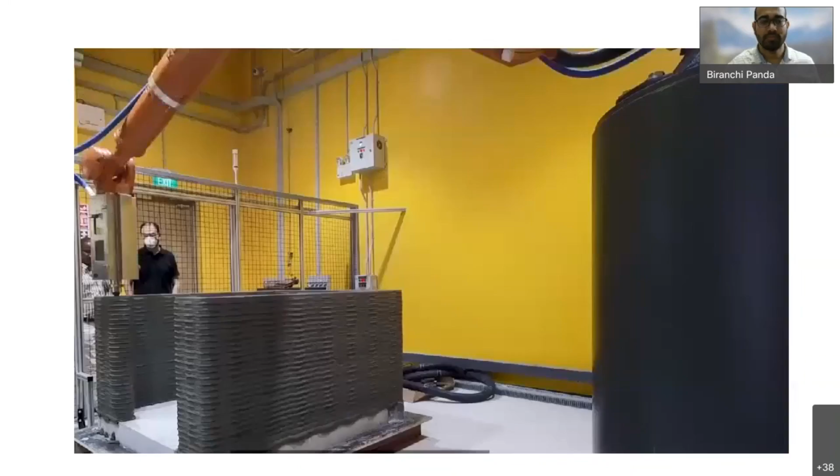After printing, we tested the structure with large scale testing to make sure concrete printed structures are not weak. We successfully passed the test, and now in the industry they are trying to implement the structure in a building.

Some advanced work has also been done to put reinforcement. We developed nozzles where this reinforcement can be added during the printing process, and addition of this reinforcement improves the load bearing capacity of the material.

We also did tests printing on a curved bed, because to create more architectural elements we have to print on different print beds. This is a non-planar print bed, and using this robotic platform we printed the concrete over this non-planar surface.

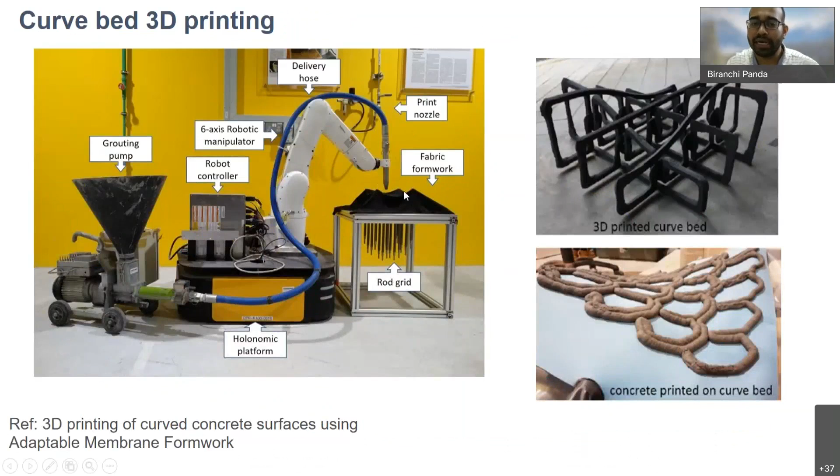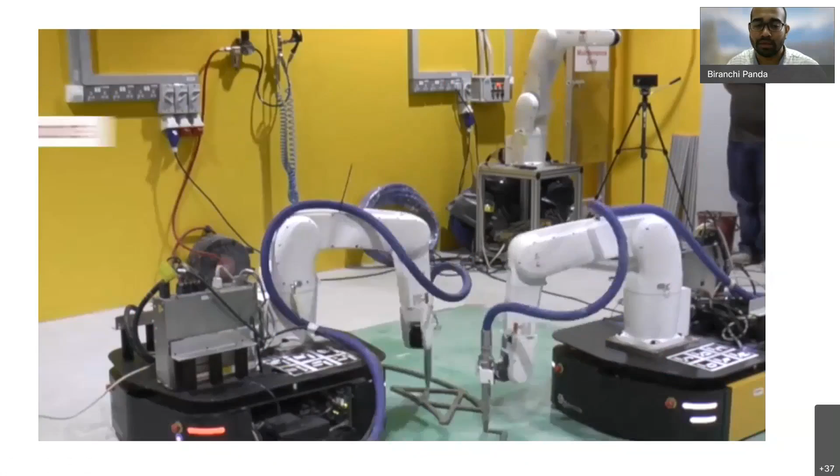What is the application of such structures? We wanted to create facade elements for buildings. Sometimes when a small robot cannot do the job, we have to take help of multiple robots. You can see in the video two robots printing a large structure combinedly without any collision - the complete structure is printed by just two robots. So multi-robot printing is important.

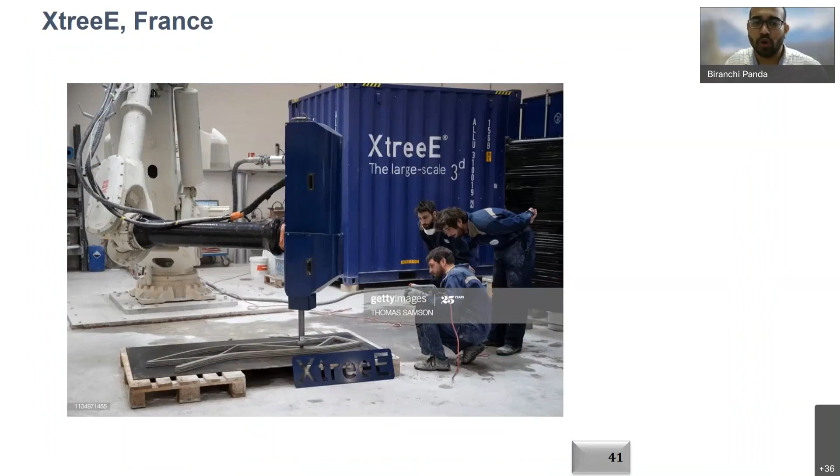I want to conclude my talk with some examples of what has been done in the world. There is a company called Cybe creating a lot of structures and buildings in Netherlands, and a company like XtreeE that is more clear about how they want to design nozzles to print more complex structures.

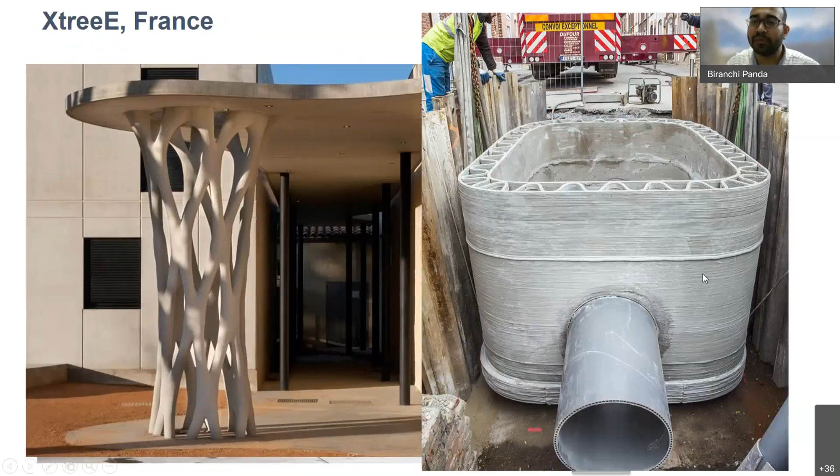This is very difficult to create using a casting process, but with the robotic system or 3D printing, you can directly design the structure and print it without the need of any mold. Recently they printed a rainwater harvesting unit because they feel it's more lightweight compared to casting, which takes some time.

This company is also more into architectural structure printing. This can be done through this printing process because you have the design, and if you properly design the material to be strong enough to support more layers, you can print those complex structures. So they're creating some furniture.

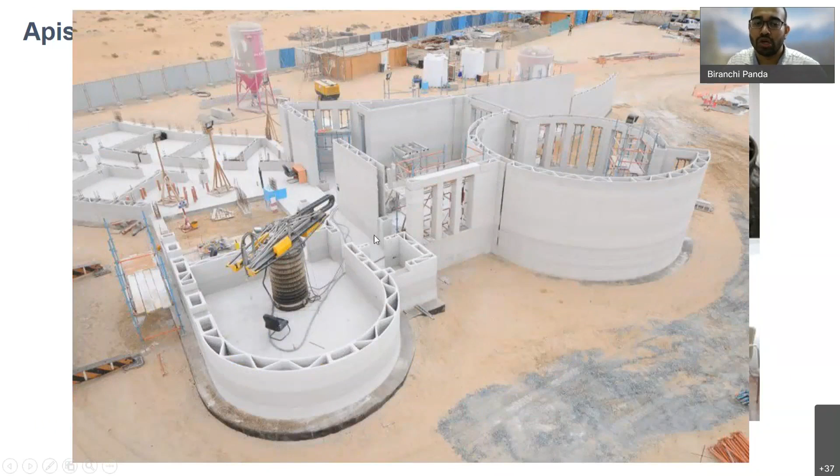This is the company I already told you about in the first 2-3 slides - they printed the entire unit in just 24 hours. Now the same company, using a crane type robotic system, is printing buildings in Dubai. The walls are no longer brick and mortar walls but lattice walls, which are more lightweight, and these lattice walls can be used to hold pipings and electricity connections. This is the entire 3D printed building.

In China also, they have already printed some buildings. They print the walls and assemble them on site to create the whole building.

At IIT Guwahati also, we have a 3D printer. We have recently started the group and we want to create more design of material mix, and also improve the machine in terms of automation, bringing more inline monitoring systems so that the printing process can be more advanced.

With this, I would like to thank the organizer. I hope there are a lot of important key takeaways, like material, machine parameters, design, reinforcement, structural integrity, and cost - all these things are very important. It's slowly being addressed by the research community, and hopefully we can do some good work in this topic.

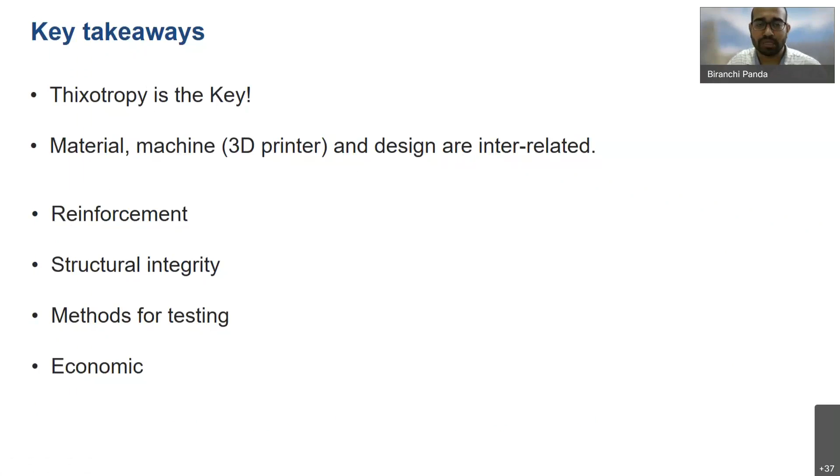Thank you very much for the wonderful session, because every child is an innovator. His innovation, or our innovation, starts with building a sand house - that's how we all start in childhood. Now we are very happy to visualize something completely organized through 3D printing going step by step, and the world is moving completely towards 3D printing. It is creating a lot more technology.